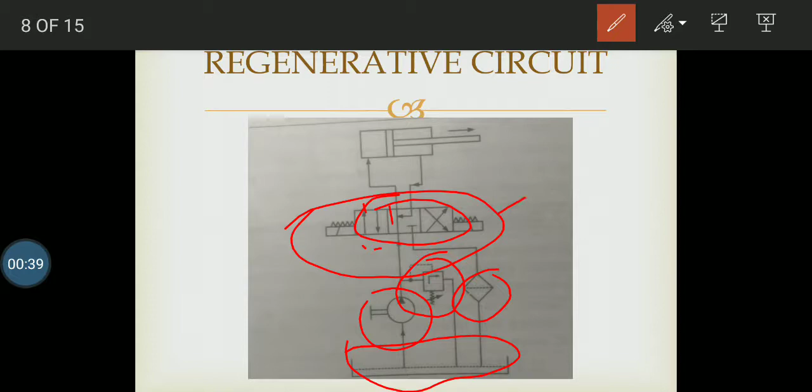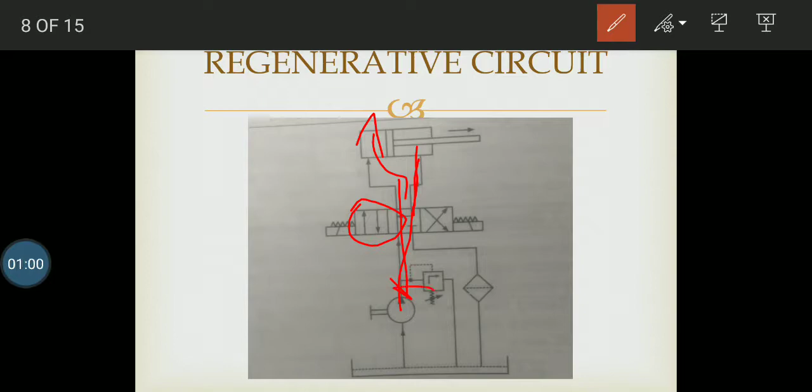In the first section and second section the normal working is there, but in the third section, which is in the middle of the DCV, we are having a supply which is going into the cylinder directly, and from the other side of the cylinder we are making an exit, which is actually coming to the DCV, but it is not going below the DCV. It is transferring to the main supply line, main input line, so that the flow gets increased, up to a particular limit.

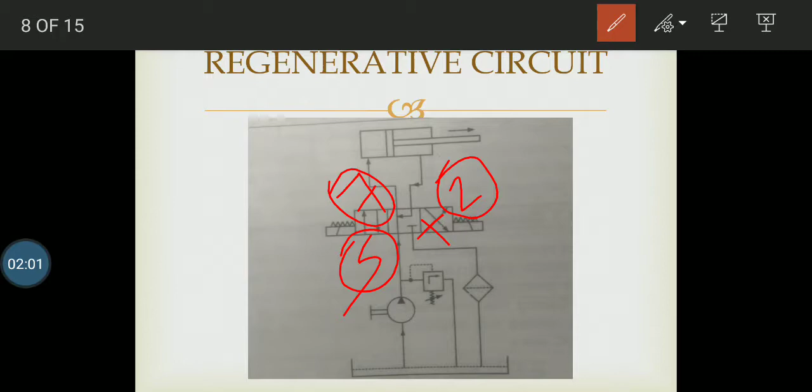Suppose I am having a flow from here which is 5, and 2 is the return unit, 2 unit is the return flow, and 5 units is the inward flow. So because of this 2, the 5 unit gets added with the 2, and because of which 7 units is supplied into the cylinder. So this is the basic working of the regenerative circuit.

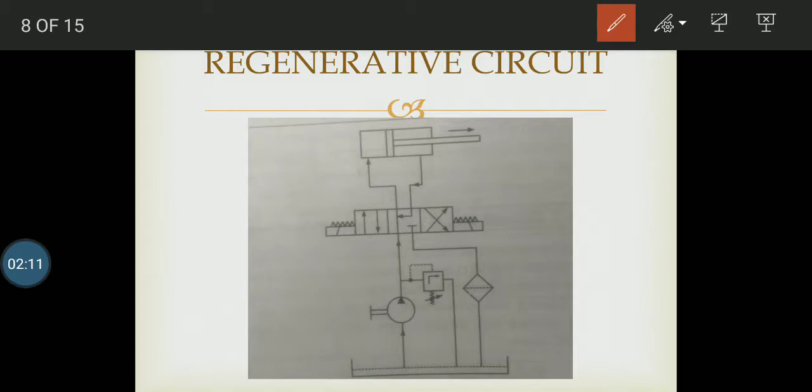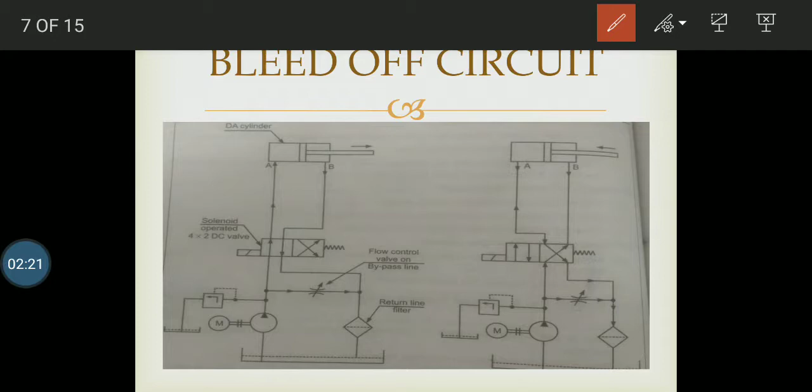So we will move further to our next circuit, which is bidirectional. One more circuit is there, the bleed-off circuit. So let's study this. Bleed-off circuit is having a construction as such: double acting cylinder, 4/2 DCV.

This is spring operated, partially spring operated, partially solenoid. Then we are having a pump, pressure regulator or pressure relief, then a variable flow control valve, and a filter. This is the complete construction. From the supply, the flow goes into the pump and then into the DCV, and DCV allows the flow to go and get filled into the double acting cylinder.

As the fluid gets inside the double acting cylinder, the piston will move in the direction from left hand side to the right hand side, because of which the fluid in the B section comes out, and then it gets returned to the drain. So this is the working of the bleed off circuit.

The difference between the bleed off and the other circuits, the meter in and meter out circuits we have already discussed, is about their disadvantage. It is having a disadvantage that the DCV of the system in meter in and meter out circuit gets damaged after a certain period of time. So to compensate with that disadvantage, we are making an advanced circuit which is known as the bleed-off circuit. So the bleed-off circuit is actually an advancement of the meter in and meter out circuit.

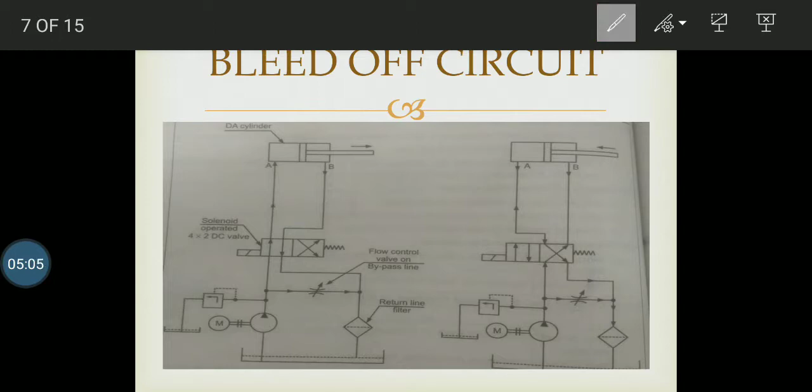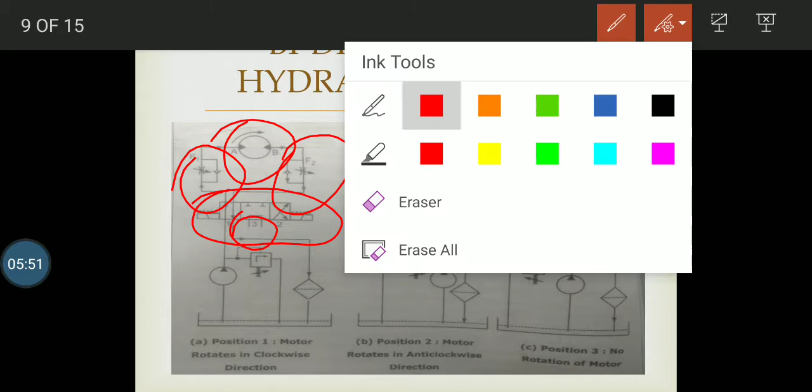4x3 DCV, semi floating type. Then pressure relief valve, filter, pump and drain. This is position number 1, and we are going to start with our position number 1.

The flow from the pump goes inside the flow control valve and the check valve, and from there to the bidirectional motor. As the fluid is coming from left hand side and moving to right hand side, the flow will be like this, and because of which the bidirectional motor will rotate in clockwise direction.

As the direction control valve changes its section from the first section to the second section, the fluid starts moving from B to A, because of which the bidirectional motor will rotate in anti-clockwise direction. Due to the anti-clockwise direction of the motor, it will start moving downwards, crossover in the DCV, and again comes to drain.

This is the second position. This is the first position in which the bidirectional motor rotates in a clockwise direction, while in the second section, in the second position, the motor rotates in the anti-clockwise direction.

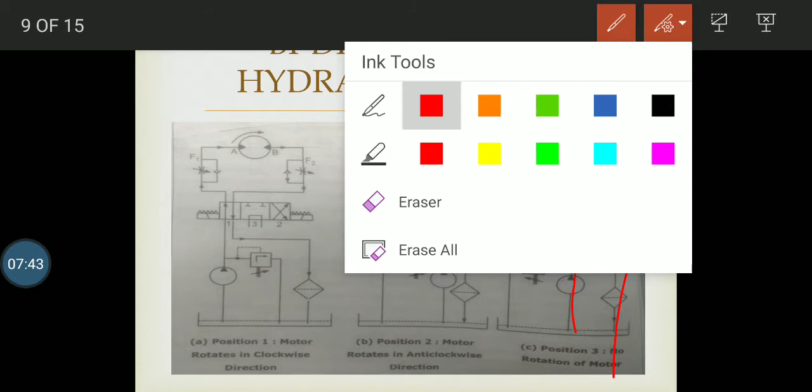Now, talking about the third position, which is the middle section of the DCV, the fluid will go up, get inside the DCV, but it will not allow the fluid to move forward or advance to the motor section. It will just make sure that fluid gets returned to the drain directly without going further, which avoids the motion of the bidirectional motor.

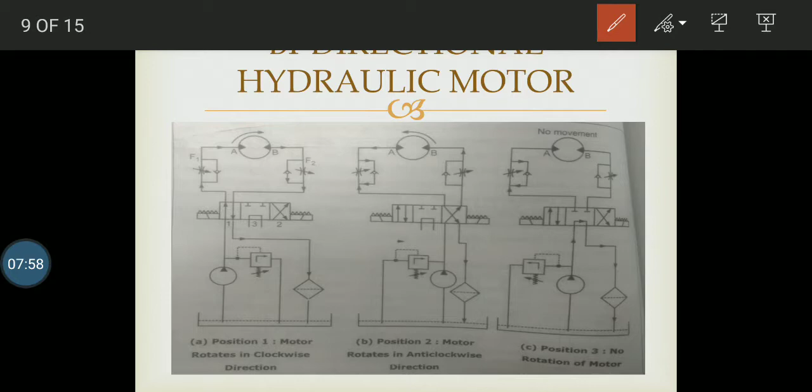So this is the complete working of the bidirectional hydraulic motor.

Linear actuators. A linear actuator is actually a synchronization of two complete parallel cylinders, using which we can easily lift a mechanism, or even lift both the cylinders together. Suppose I am having a floating chamber over here. So to lift the chamber or floating floor, we are required to move the pistons synchronously together. So to do this we are using this circuit, linear actuators.

We are having a pump over here, pressure relief valve, then filter, 4x3 DCV solenoid operated, two pistons are over here, and this is a coupling, or we can say a weight extra added. Then the piston will move straight into the DCV, the flow will move straight into the DCV passing through the pump, and then it will get split into two types.

First, it will move into the first piston with the inlet port A1, then from here it will move the second part of the stream into the second piston from port A2.

Similarly, we are having another flow because we are having double acting pistons. So the second port will have an exit from B1 and will move down, get it added to another stream from the second piston as B2, and then it will move into the drain.

So together we are actually dividing a single stream into two streams in both the lines. Because of the moving forward of the fluid, it gets split into two parts and it will lift the piston upside. But when talking about the second position...

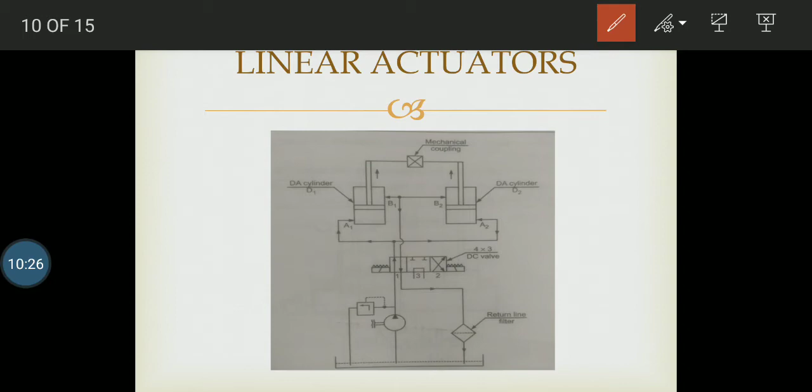Because of the second position, the fluid will move in the reverse direction and it will go into the B port and it will lower the piston synchronously, meaning together. So this is the complete advantage of the working of the linear actuators.

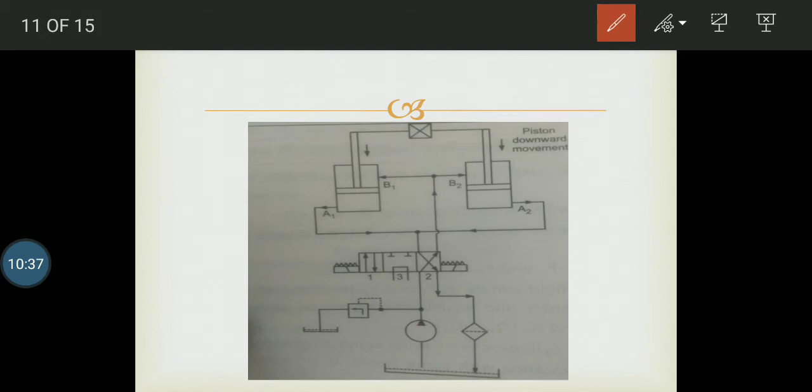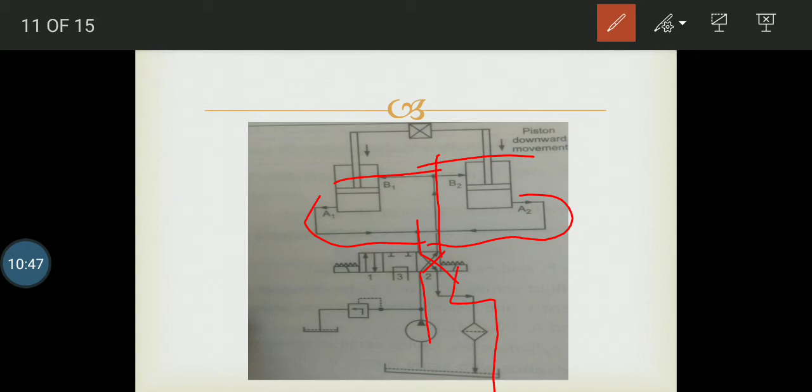This is the second working. It will get crossed over and move into the B section of both the cylinders, and the A section will come outside, get added, crossover, and then into the drain. This is the complete working of the cylinders.

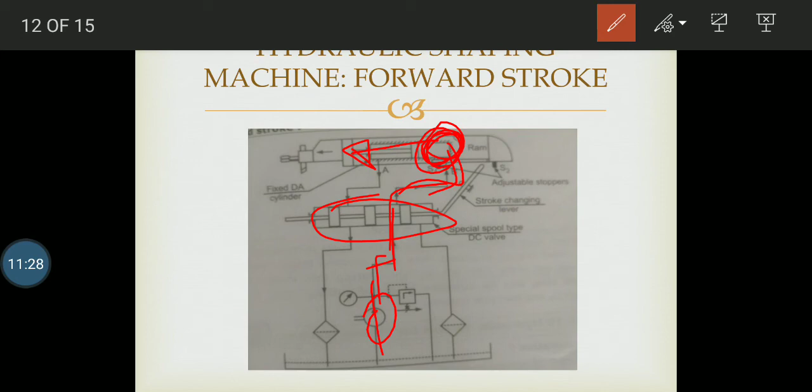It allows the flow to move inside. Because of this movement, the fluid gets filled in this section, and hence the ram moves in the forward direction from right hand side to the left hand side, because of which the cutting stroke will take place.

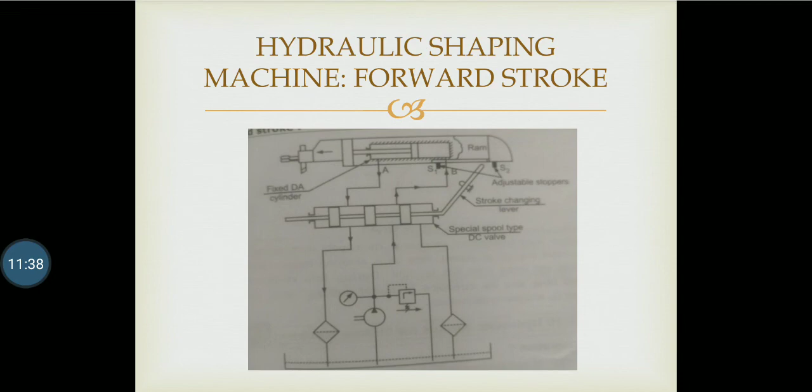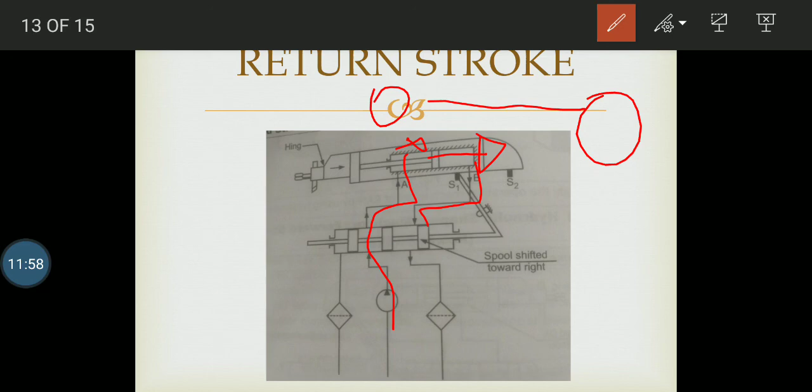Similarly it will work in the return stroke. So this is a return stroke in which the fluid is moving inside. This is moving inside, because of which the piston ram will move in the forward direction from left hand side to right hand side, and because of which the complete section gets moved forward, and hence the tool cuts the part. This is a hydraulic shaper or a shaping machine, you can say.